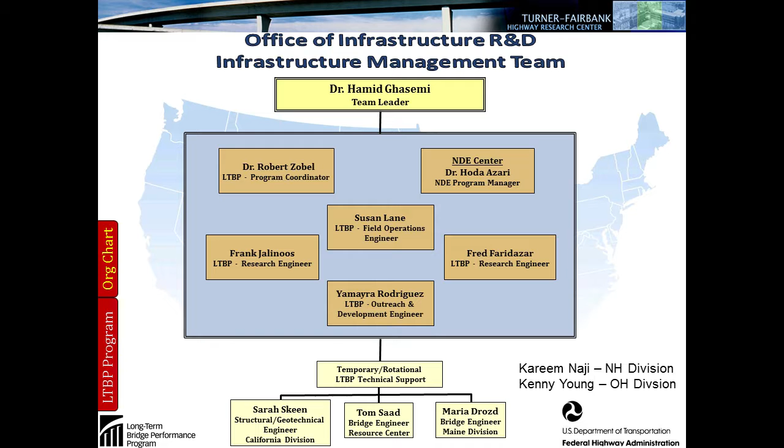This is the team at FHWA at Turner-Fairbank, headed by Dr. Hamid Ghasemi. Rob Zobel is the program coordinator, and they have a bunch of folks that are part of it, as well as some temporary rotational staff that rotate in and out of the Turner-Fairbank office, all helping move this long-term bridge performance program along.

So what we want to talk about today is some of the products that they've put together already, what's being done on the data collection, kind of a status update, and then where the vision is going forward.

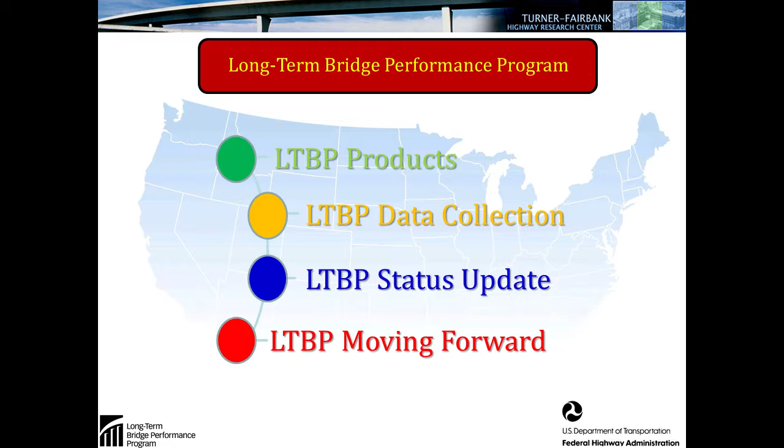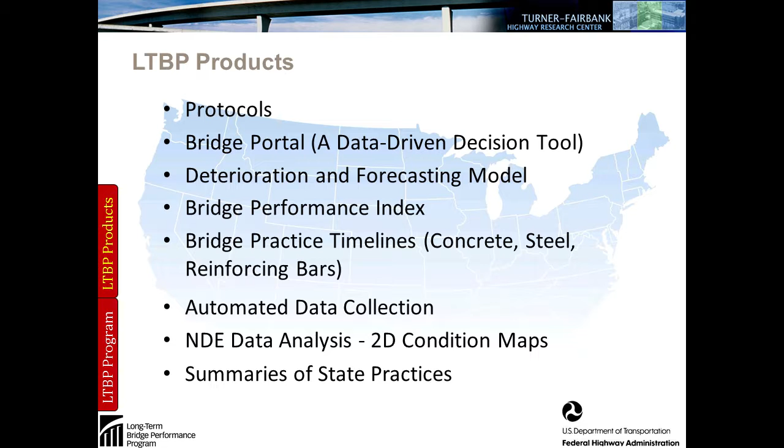The products developed to date include the protocols, which are the way they're going to collect data, store data, and test the sampling on concrete decks and other pieces of bridges being tested. There's a bridge portal that I'm told is operational, but some states are still having problems getting in. I'd suggest you get in touch with Rob Zobel, who is heading up the project, to get the access you need. They're developing a deterioration and forecasting model based on data collected to date, a bridge performance index, and bridge practice timelines. I won't go into these further right now.

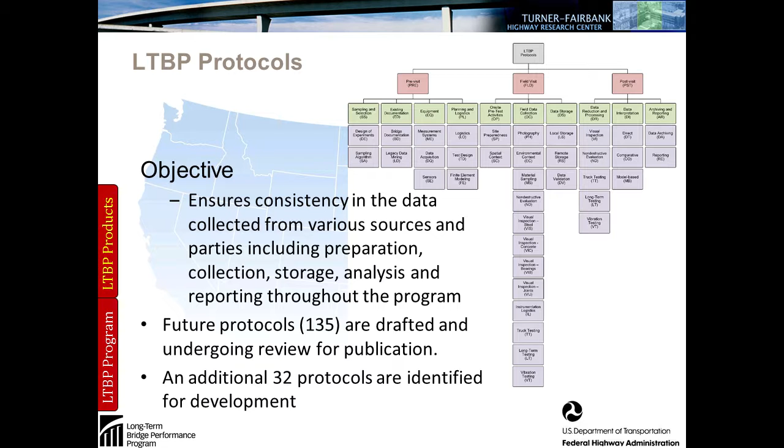The LTBP protocols they've developed so far number over 100 right now. It's really for the consistency of the data you're collecting. This is research quality data, so it's a bit more in-depth than you would collect in your normal NBIS inspections. There are also more protocols drafted and under ongoing review, so it's all coming through. If you as a state would like to utilize these protocols when doing your bridge inspection, feel free to have at it, and you'll be collecting data that can be put into the portal because you're using this methodology, although it is much more time consuming than your normal NBIS data collection.

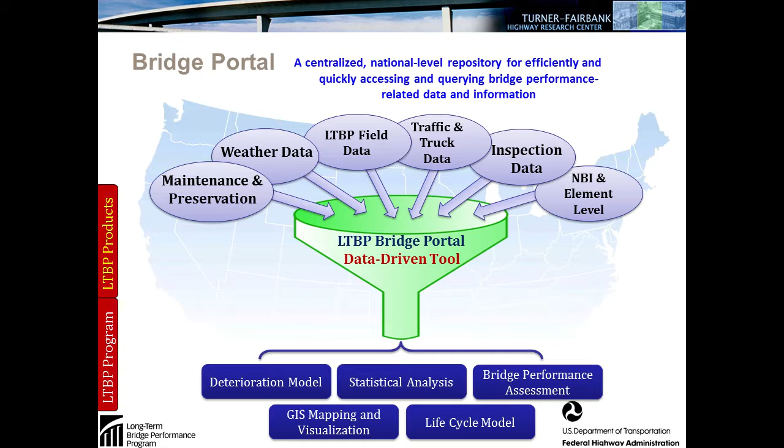The bridge portal is a tool that's going to collect all the data and allow them to do deterioration modeling, statistical analysis, life cycle modeling, and visualization and mapping of where these bridges are that are in these conditions. It collects all the information that affects a bridge's performance - your traffic data, weather data, what type of maintenance and preservation has been done on bridges - those sorts of things are all collected and put into the portal, and they use that to develop models and make decisions.

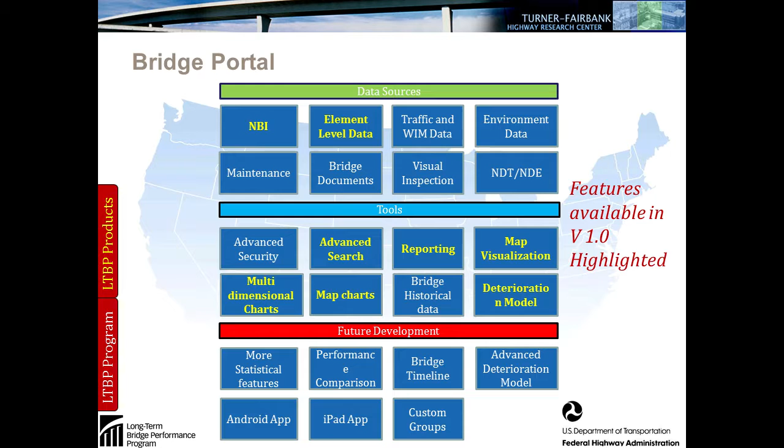This is what Rutgers is doing - they developed the portal. They're the ones charged by FHWA and the Long-Term Bridge Performance Program to develop that. At TRB this year they had a half-day session on Thursday, the last day there, where they actually walked you through the portal. So they can do it, and I'm assuming that if we could get access to it, we could do it as well.

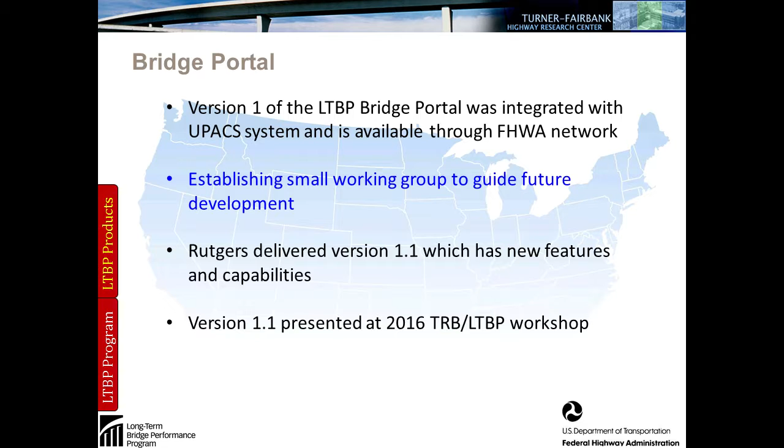They've done this theoretical model and validated it with the field data they had. They just need to make it more robust as they bring in other data that's being done right now in New Jersey, New York, and New Hampshire, plus what we've done in the Gulf, as well as what PB is doing out here in the West.

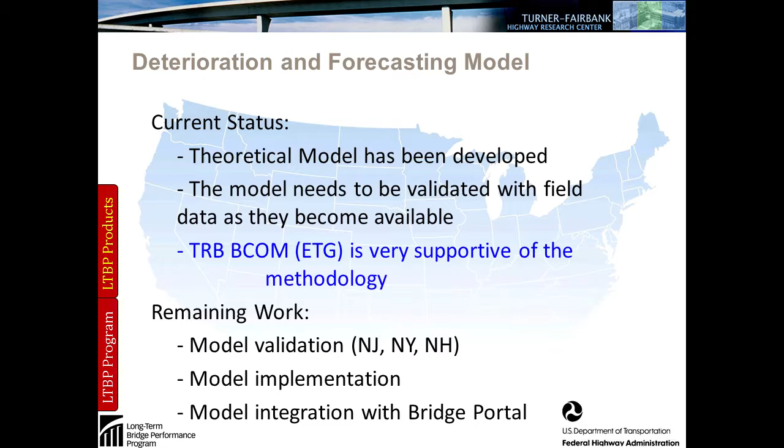One thing you heard Carlos talk about in his opening remarks was that there's got to be a plan for each bridge. Mike Johnson touched on this too, how each bridge is going to be different based on the climate, the truck traffic, when it was built, and what materials were used. One thing they recognized with the Long-Term Bridge Performance Program is there are different timelines of changes in the way bridge practitioners have designed and constructed bridges.

So one thing they've done is develop and publish a tech brief noting the changes in reinforcing bars, so that when you're comparing the performance of a bridge built in the 50s with one built in the 70s, the reinforcing steel was different. How does that impact your bridge's performance?

They're also in the process of developing timelines for bridge materials, both from a federal perspective and a state perspective, so they're looking to collect all that data. That's actually being done by the folks at Turner-Fairbank, some of the same people that were in that opening box I talked about.

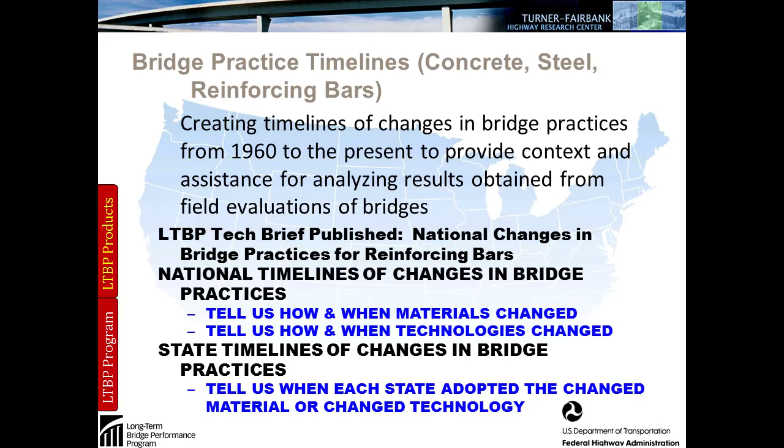This is a sample of what they're looking to collect: some states were using latex modified concrete, and now some are using polyester polymer concrete. Why did they make the change? What differences are you seeing in performance based on product X versus product Y?

And how does that all play into the national performance of bridges nationwide? I think that's a redundancy there. But that's how I am.

So how are they collecting the data? How do they propose to collect the data?

They've sorted the country into both clusters and corridors. I tried to get them to change the name from clusters because there's another word that usually follows cluster that my mom wouldn't let me repeat, but that's the way it's broken out. The clusters are based on weather patterns, basically where you'd see commonality in the weather across your bridge population.

And the corridors are basically some of your high volume corridors, where you'd want to see how those corridors are performing across the country.

Right now they've done a few of the clusters but haven't done any of the corridors yet. That's coming out in the fall—it was supposed to be out in the spring, but it's been pushed off. It looks like a proposal to gather on the order of 800 bridges in the corridors and clusters as a next step for the Long-Term Bridge Performance project.

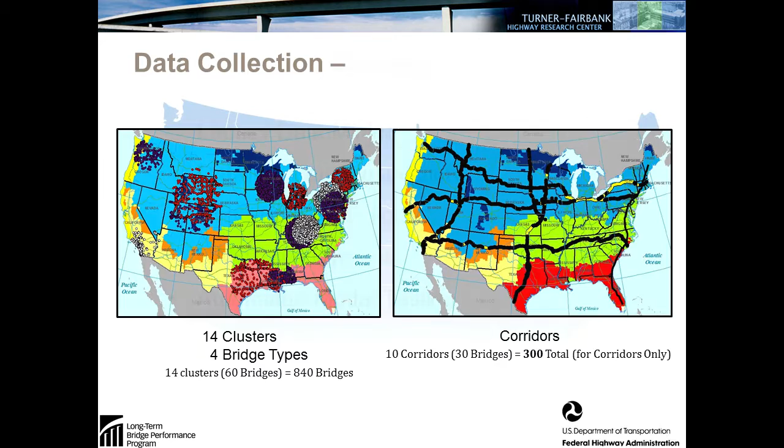So the data collection strategy includes data mining, visual inspection, some NDE along with the visual inspection, the robot-assisted bridge inspection technology—the RABIT, as they call it—as well as some modal testing proposed. I'll go into each one of these a little bit.

The legacy data mining goes back to what states have—what do they have about the distribution of bridge characteristics among and between the bridge clusters and corridors, what parameters are used to identify bridges that will serve as representative bridges for each type, whether it be steel girder with concrete deck, concrete girder with concrete deck, or other types, and how those parameters affect bridge performance.

So what's being done to date is there were 4 indefinite delivery, indefinite quantity IDIQ contracts awarded by FHWA on the long-term bridge performance program. The firms that got the work were PSI, Michael Baker, PB, and Pennoni and Associates. The legacy data mining is being done by Rutgers, which ran the original part of the long-term bridge performance program, as well as the folks at PSI.

They've got about 400 bridges that they've done the data mining for, that they're incorporating into the portal, and they need to collect about 500 more bridges to continue to do the statistical analysis that they'd like to do. So here are the contractors that are doing the work.

Rutgers has already done 2 cycles of inspections in that Mid-Atlantic cluster, and they are using the RABIT in their bridge inspections.

Michael Baker, we completed our first cycle of inspections for the Gulf Coast, and it's steel and pre-stressed concrete bridges in Alabama, Arkansas, Florida, Louisiana, Mississippi, and Texas.

PSI are the folks that were just doing the data collection, in terms of just doing the paper studies to come up with that data.

And PB is the ones that are working out here in Arizona, California, Nevada, Oregon, and Washington. They are done with their inspections in Arizona. I believe the plan is to do the inspections in California and Nevada in May, Oregon in June, and Washington in July.

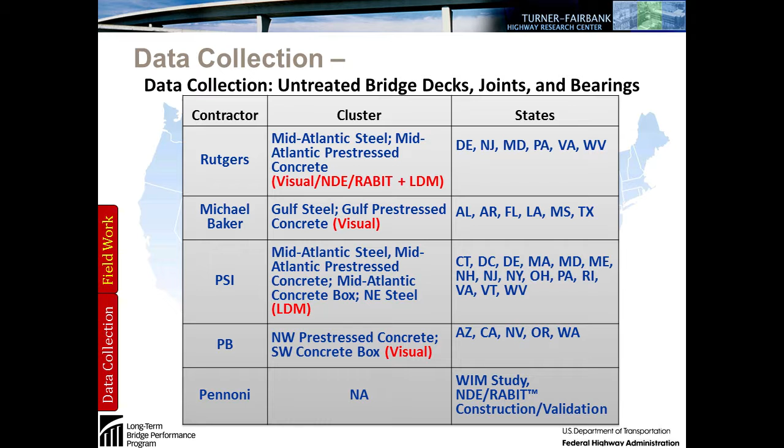And Pennoni is doing, they weren't doing any of the data collection, but they were kind of like an on-call consultant helping the folks at Turner-Fairbank with a variety of aspects of the project and the program. So again, here's kind of the overview of what everybody was doing.

This goes into a little bit of what Pennoni was doing. They're doing a weigh-in-motion project with Oregon. They're working with the folks from Federal Highway on the long-term bridge performance index. They're doing the website, the newsletter, and all that kind of behind-the-scenes stuff that are helping FHWA and Turner-Fairbank, while the others of us are actually doing the data collection out there.

So this is the breakdown that we did in the Gulf Coast, and it's basically 2 to 7 bridges in each state. If it was a cluster bridge, we only did chloride sampling in terms of testing. If it was a reference bridge, we did 2 types of chloride testing, chloride penetration and chloride profile, 2 different types of modulus of elasticity, as well as a compressive strength test.

So we're complete with that, and we are also having a little trouble inputting our data into the portal, so we're not quite done with that, even though we're done with our field work. So that's essentially what we're doing.

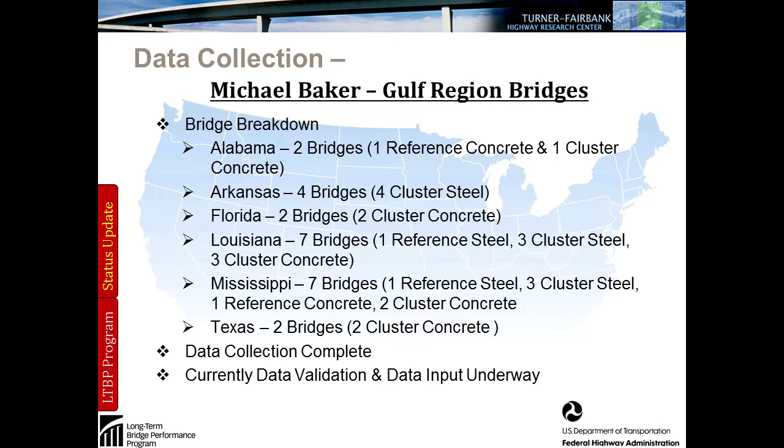Again, this is the work that PB is doing, and like I said, their collection is ongoing, and they hope to have it done by the end of the summer.

They had some problems. One of the issues that we both ran into, both PB and Baker, were the bridges that were selected originally from just a paper study perspective. They just didn't work. I know one of the bridges in Nevada had over 100,000 vehicles per day, and there's no way they're going to be able to close a lane and do some work, so that was just not going to happen. So they had to go back and come up with a new list of bridges.

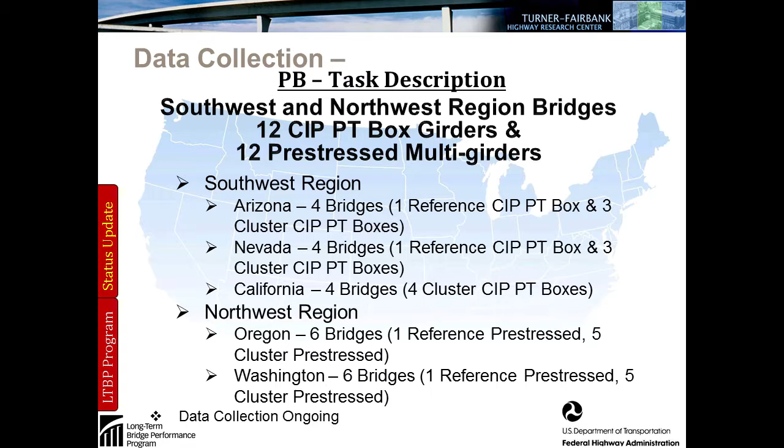And Pennoni is doing these various things. I think I have another slide that talks about one of their main projects, the Weigh-in-Motion pooled fund study that I think they're working on. So I'll get to that in a minute.

This was the focus of the first part of this effort: untreated decks, bearings, and joints for steel multi-girder and concrete girder bridges. That's what we were out there looking at. We and Rutgers looked at steel multi-girders, concrete, and pre-stressed concrete multi-girders, and PB is working on the pre-stressed concrete boxes out here in the West.

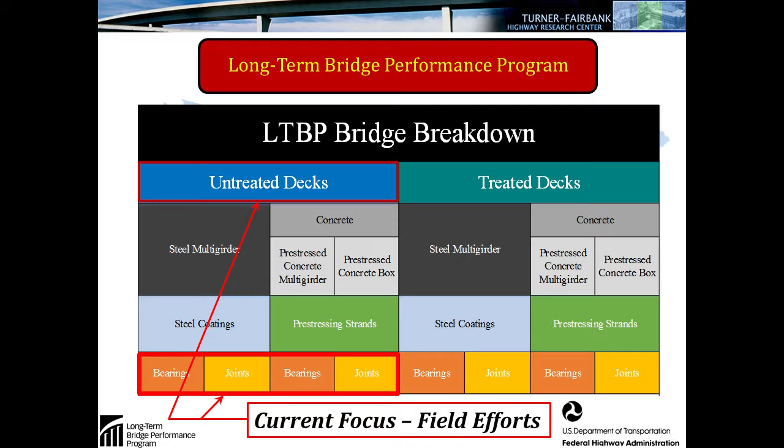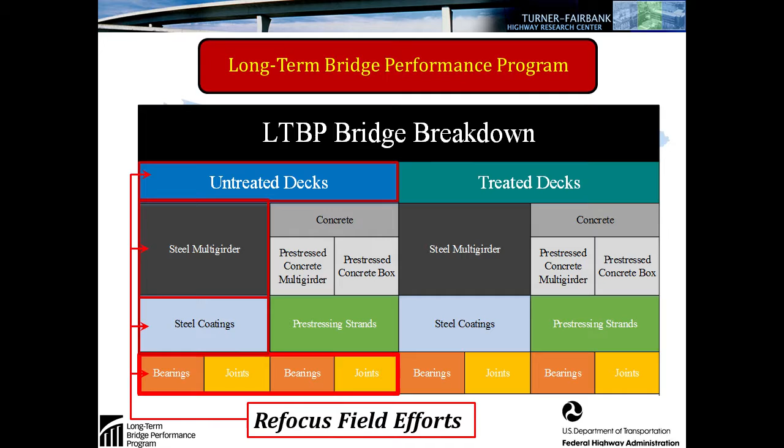The next effort will really be a continuation of this, but they're going to pick up steel coatings, and I think the next phase is also going to include treated decks. This is kind of the timeline they're looking at to try to get all this work done.

It's a long-term bridge performance program, and the focus has been on providing products while also focusing on the long term. There's a desire from the bridge community to see more from this program, but the reality is, until they collect the data and are able to analyze it, the products you're going to see are just little bits and pieces along the way, like some of the early versions of the deterioration model.

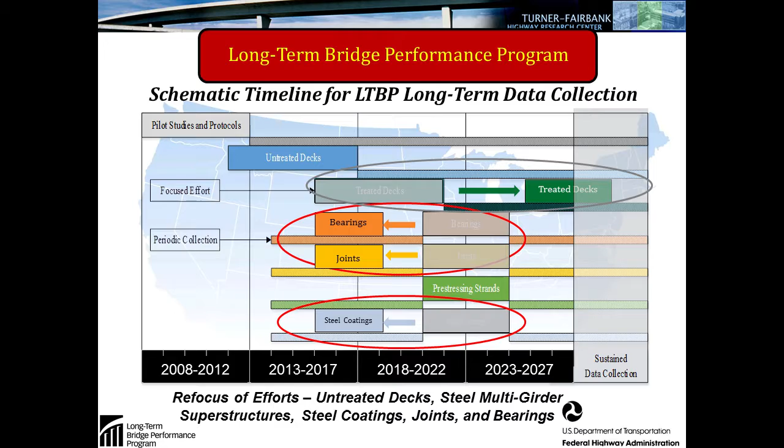You'll see some of that, but it'll all get refined over the years, similar to the long-term pavement program, which is what it started out trying to mimic. If you know anything about that program, it took over 20 years before they got any usable data back to the states. The folks at FHWA are cognizant that we live in a different society now, and they want to provide products that people can use along the way, and that's what they're trying to garner.

So this is kind of the look going forward. What you're seeing here is the bottom rung of those bridges is what we're working on right now, set one. Rutgers has actually done two sets of the Mid-Atlantic region.

The next phase will include a second phase of the Gulf, but there'll also be a first phase of, say, the Ohio Valley, or a first phase of the mountain region, which would be right here in Utah, plus Denver or Colorado and a couple other states in the mountain area, like Idaho. Whatever makes up that cluster would get in on the first round in the next go-round.

Each time you build this up until you get to a data set sufficient that you can predict performance, there'll be an evaluation as we move along.

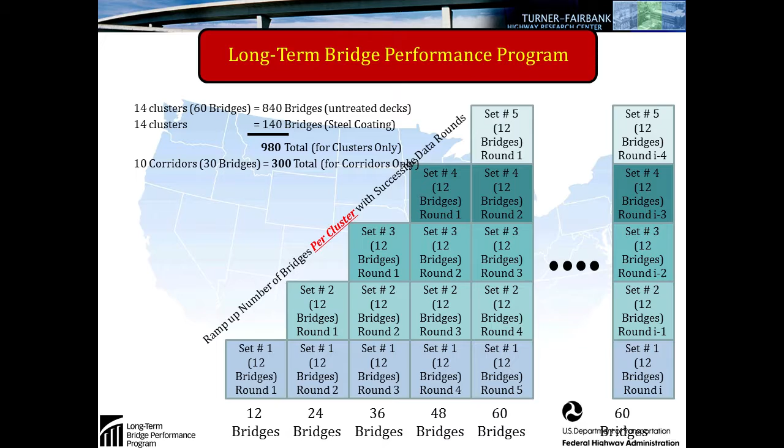Just a little bit on how the program works: the long-term bridge performance program at FHWA is guided by a TRB Bridge Committee Expert Task Group, which they report to. They just had their meetings last week, and they've approved this draft business plan, the strategic roadmap, and the pooled fund study of the impact of live load on bridge performance.

That's what Pannone is working on with Oregon, putting a Weigh-in-Motion system at a bridge so they're able to collect data. I believe it's on a road with heavy logging truck traffic, and they want to measure the impacts that trucks are having on bridge performance.

Then there's the Virginia pilot bridge, which was taken out of service. What they're going to do is take parts of this bridge to Turner Fairbank and test it forensically, to determine just how much life was actually left in it.

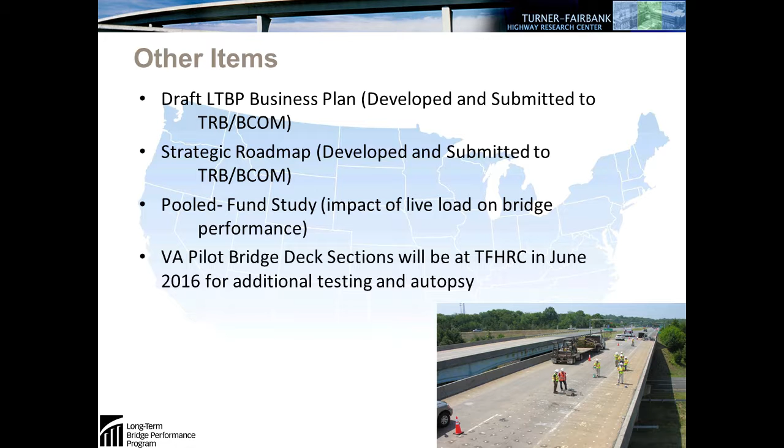I think this is really a good case point, similar to what we heard Mike Johnson talking about: this bridge is coming out of service, but not because it's in really bad condition. It's due to the volume it needs to serve, it's going to be widened. So I think this will be a good case study.

This is the pooled fund study I mentioned that Pannone's working on with Oregon. The other states involved are Minnesota, North Carolina, and Pennsylvania.

Anybody else think PN is not really the word for Pennsylvania? But, I don't know.

In our program today, we had Chris Keegan from WS presenting. This is really to make the case of what the trucks, when you get a truck, what is that load? They're instrumenting all along the beam so you can watch the truck move along the girders and understand what that influence really is. That's an ongoing project that I think is going to get underway this summer.

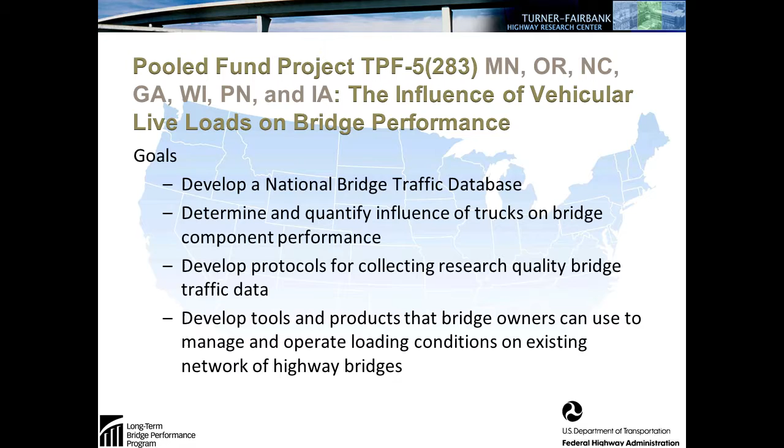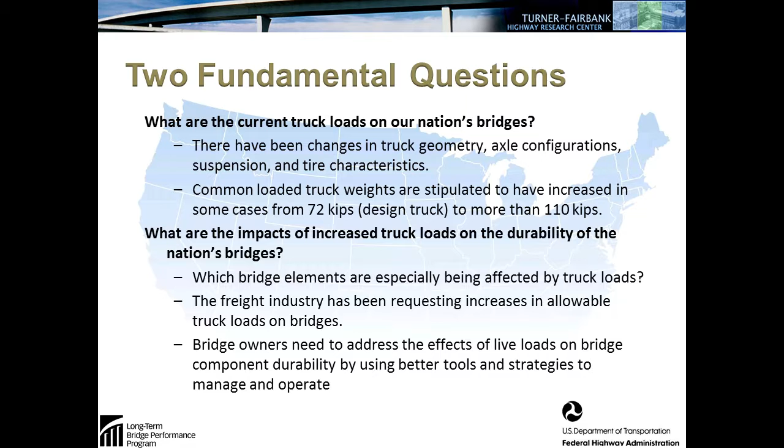It's looking at the fundamental questions of what are the current truckloads, what are the impacts on our bridges. Once we can understand that, I think we'll be in a better position as Congress pushes to increase truckloads, to say what those impacts would be. But if you don't know what the impacts are now, it's really difficult to say we think there'll be this later. It's a lot of seat-of-the-pants engineering, if you will, in terms of not really knowing.

So that's it. I think I went through that fairly quickly. I will take a few questions. I can't say I'll know all the answers, but hopefully I can.

Can you comment at all on the functionality of the website? The last time I tried to log in, I'm the state coordinator for Utah, I could not get in. I requested access, they sent me an access, that did not work. Then I think I did a couple more hoop-jumping exercises and still could not get in.

Josh, unfortunately, I don't know that that's not a common problem. I think others have had that same problem. I know we've been having problems just updating our data into the portal, and we have access, and we've run into that. I think one of the things is Federal Highway, and I don't know if Raj is here or not, but their firewall system is significantly different than any other state firewall I know of, because to get in there and get hold of that information is very, very difficult. So I think it might be something there, because part of this is, the portal's being developed by folks at Rutgers University, and they're working with folks at Federal Highway and Turner Fairbank, and I think there might be some issues going on there. But I will bring that back, Josh. I certainly will. Thank you for that.